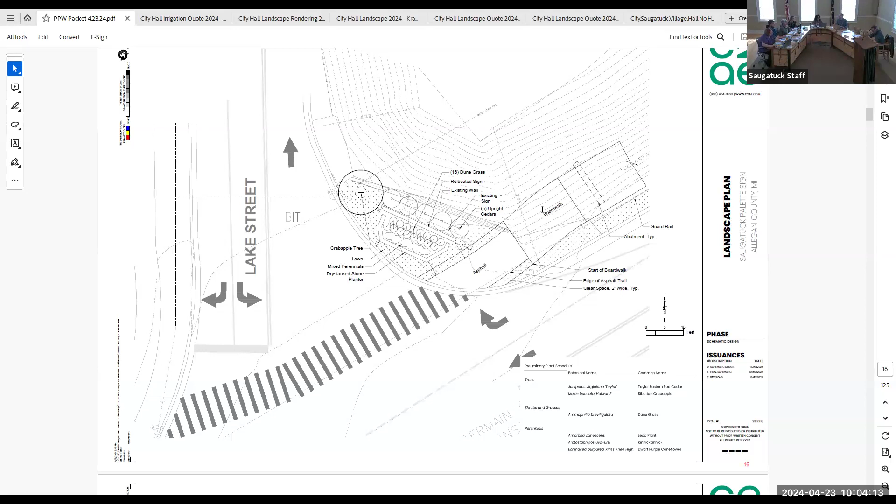Yes, please. Can you share that through Zoom too, so that way if there's... All right, so if you kind of zoom in, Sarah, it's in the middle of the page there. Zoom in, not... there we go, all right, yeah, a little bit more, my glasses, a little bit more, okay, a little bit more if you can, yeah, there we go, all right, so.

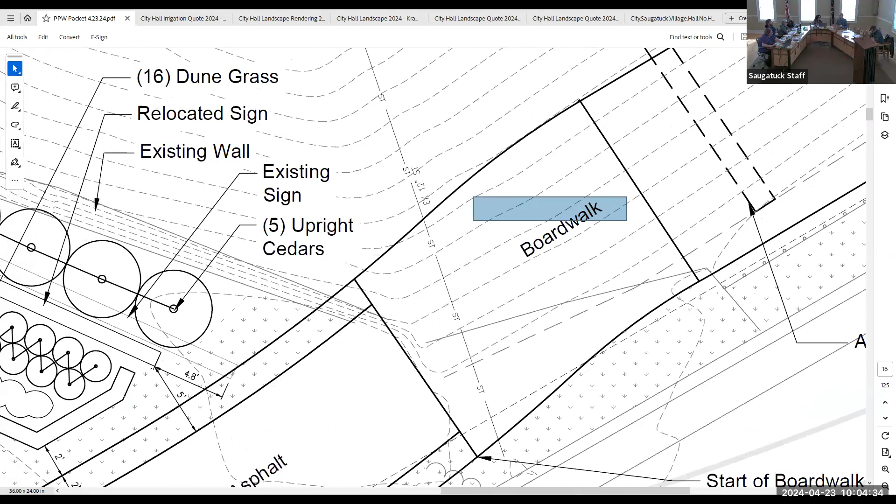There we go. So you can see that notation there on the right side of your screen that says 4.8 feet. That's showing, essentially, you're shifting the pallet sign nearly 5 feet, is what that shift is there. The lighter rectangle behind it is the current location of the pallet sign, and then the darker line is showing the relocated sign.

And then Brian, can you point that out? Sure, what do you mean? Brian, will you hold your microphone so that people online can hear him talking? Is that helpful, I don't know if it works or not, but. So the lighter line here is the existing pallet sign, and then this is where the pallet sign would be moving to. Right here shows the shift from here to here is 4.8 feet.

Then you're looking at what Jared clarified, looks like a quarter of a foot shift forward as well. So it's potentially closer to Lake Street and not down the ravine, is what he's saying. Got the shift on the sign, okay. My understanding is that right, okay, that's accurate, Jared? Yes, yep, so, yeah.

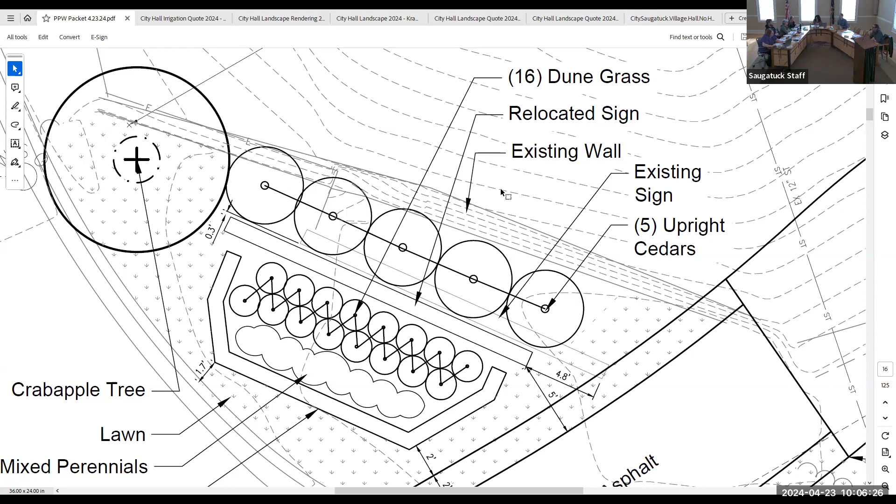So not a ton of movement of the pallet sign, but enough to move it to make sure that there's adequate space for the trail. I think initially there was some discussion at one of your first meetings about maybe even leaving it where it was. And then there was concerns about maybe not having enough separation between the trail and the pallet sign. So they've also updated, and you can zoom back out, the intersection layout, and took out that middle pedestrian island that there was some discussion at the last meeting about whether that was necessary or not, especially if there was going to be signals and things like that.

There's also some concerns raised by the Department of Public Works related to plowing and whether or not that was going to be an impact on their operations there, as well as the ability for those larger trucks to have space as they're turning.

So the intersection design has been updated, and the traffic signal placement is really dependent on what the ultimate final design of the intersection will be. In your packet is another copy of the rendering that Fleis & VandenBrink, our city's engineers, had previously developed, and their traffic signal design will be consistent with that rendering. Correct, Jared? Yes.

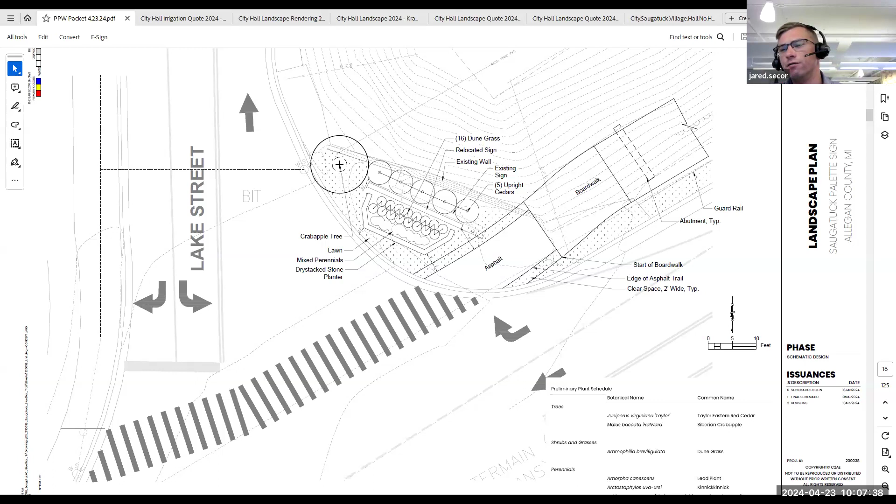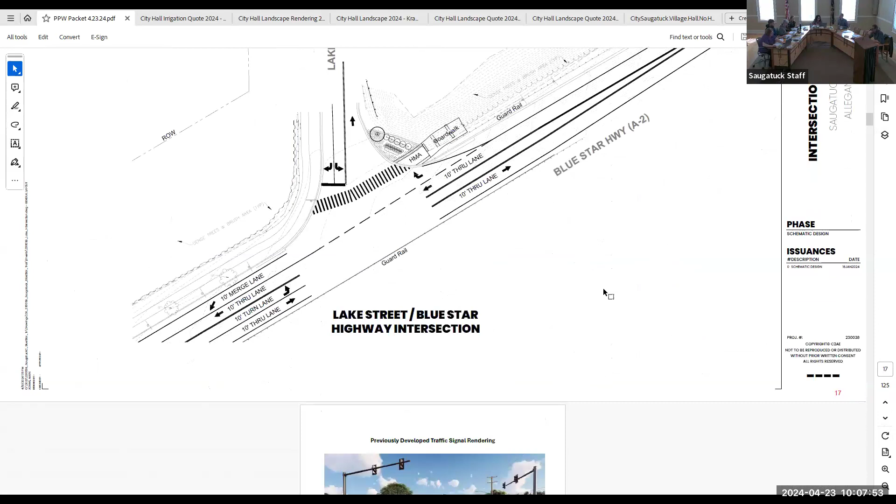Anything else that I missed, Jared, that you want to add or touch on? No, we didn't look at the other plan because we gave a more overhead view of the intersection, not specific to the landscaping. Not too many details there other than the roadway markings, and that detail's included on the other sheet. Yeah, we did want to look at that — that's page 17 of your packet, and Sarah has that on the screen for you.

Now, Nancy, I know you had questions on the light placement. Right, just that this diagram doesn't show where the traffic light would be placed. And Jared, can you comment on that?

Yeah, so we are using a sub-consultant who specializes in traffic signal design. With them, it's not so much the conceptual design iterations we've been working on for our layouts. We want to give them an approved layout so they can go to work on the traffic signal design. We need to get this approved before they get started on it. So we are anticipating doing the traffic signal in the locations shown on the rendering from F&V. However, as far as the process goes, we need to have this nailed down before our sub-consultant starts working on it, just in case anything changes down the road design-wise.

You mean the plan needs to be finalized and then you'll be able to decide exactly where the light goes? Well, this whole intersection in general — the traffic signal is for the intersection. So as far as where the lane goes, how much curb we're adjusting, we need to have that all finalized before our traffic signal sub-consultant starts moving forward with their design.

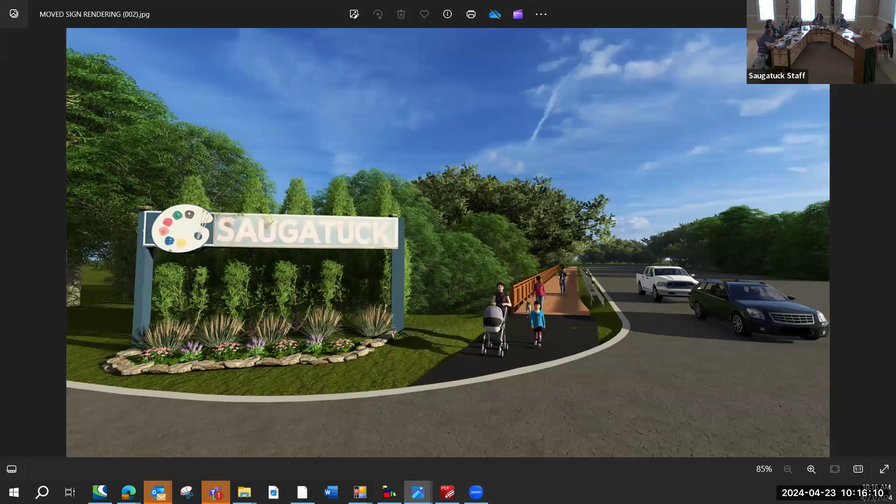So it seems like, if the lanes stay the same, how is there room for that? I think the lanes are getting more tight, more narrow. Is that correct, Jared? The traffic lanes are actually going to be a little more narrow, aren't they? Correct.

This will... and you guys are seeing the layout right now. Can we move back to it, please? He had it up there. Yeah, can we move back to that one? Is that you, Jared? Okay, you up? Can see that. There you go. Okay, so which way are we going?

This would be looking north, on the Douglas side. What we had discussed is this was a plastic bollard that was included in the original design, just for this graphic, but stakeholders didn't like that. So we had discussed putting in a raised curb with a kind of decorative wave delineator, between the traffic lane and the bike lane.

Okay, so are we stealing from the shoulder? So there's the sidewalk and then a little bit of the shoulder on the east side of the street? So then that's being put on the other side and then potentially narrowing the lanes, and that's where we're getting the space for this to be going both ways.

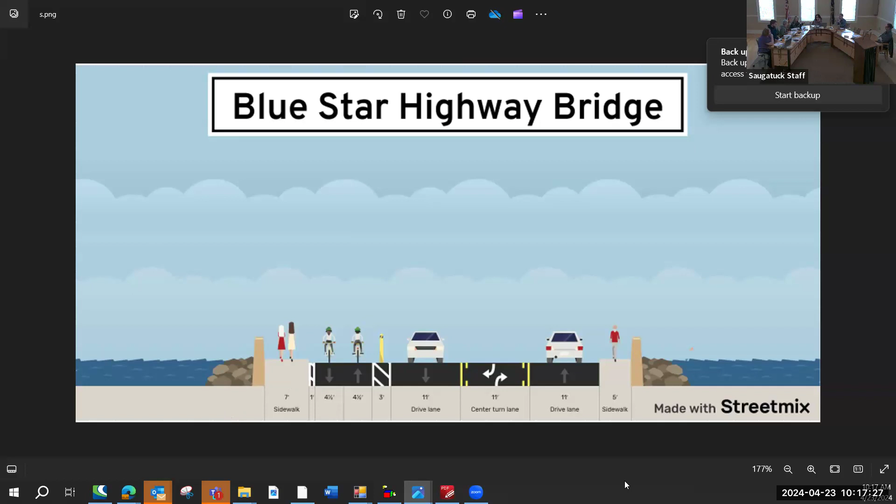Okay, how wide is the bike lane right now? Like 5 feet? There really isn't a bike lane per se. I mean, it's just a tiny shoulder, there's just a little bit of shoulder. So if it's gonna go to 9 feet, then it's gonna come from somewhere.

If it says 4.5 and 4.5, but to my mind, there's a bike lane there. But I don't let my kids ride on that. When we go by, they go on the sidewalk because the cars go so fast and the shoulder is so close. Okay, so some of it's coming off the shoulder then. That makes sense. Thank you, that's very helpful.

Does that make sense to you, Nancy? Are you good with that, being shifted in that way? Yes, yes. And then the roadway's everything's gonna be compressed a little bit, and then the shoulder will be eliminated, and everything's gonna be aligned on the west side. Got it.

And Scott, as far as you know, what is it? So we're 33 feet on the road that accommodates the emergency vehicles and that sort of thing? Do we have any issues there if we take some of the shoulder for the bike lane? Not that I'm aware of at the moment. All right, okay. And then 4.5 and 4.5. Got it.

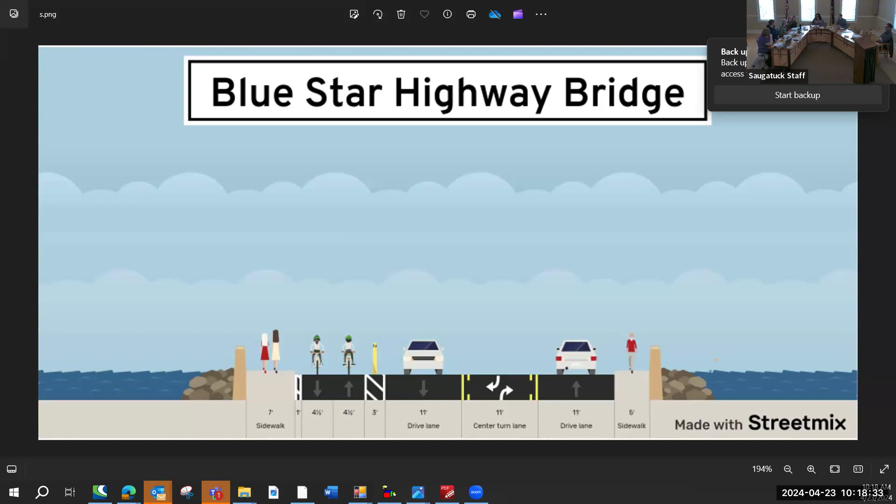Okay, so the last question I have is just going back to the pallet sign. Is there money in the grant fund to cover all of this, or is there any extra cost associated with our pallet sign relocation plan? So based on the estimated cost right now, is the city going to get an extra bill?

Does the grant cover it? You know, the original grant, we always knew we needed to move the pallet sign. So with the design that we've selected and the plan that we've got here, is there any incremental cost to the city, or are we good? Because the grant money is adequate, we think, to cover all this.

Yes, everything included with the pallet sign changes would be included under the grant. And as of right now, the only item that we've identified that wouldn't be eligible for the Blue Star Trails grant would be the traffic signal. Right, okay, that's perfect. And there's room in the grant, at least based on the updated construction estimates that C2AE was able to put together. So luckily, the construction estimates are coming in as expected, even though this was all put together a few years ago.

You don't always see something surprising like that, that's wonderful. So, now granted, that's not bid yet, but maybe we'll end up in the other direction and be even happier.

Those updated numbers are looking good, including the pallet signal work. I appreciate Ms. Roche for forwarding a grant opportunity that has arisen that we might be able to apply for, to have the traffic signal work covered under a separate grant. It aligns well with the goals of this project, and Jared was able to hop on a webinar last Friday to learn more about the opportunity, and feels we may be a good candidate. Obviously it's competitive, there's only so many dollars, but the answer's definitely no if we don't apply.

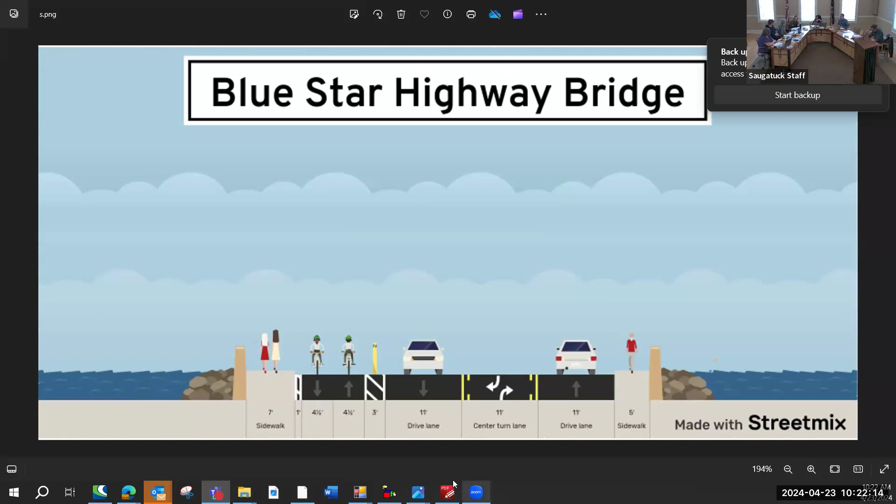And I know we got John's comments, but Scott, if anything has changed with the truck turning radius, we do not believe it's an issue. So as it stands, we're good with moving forward with just doing the rolled curb and the smaller curb size. That should be sufficient and also less expensive for the city, and we don't have to change as much in terms of the pallet location because of the setbacks.

Okay, we're all square on that one? We went back and forth on it, there was a need, and then we talked it through, and it was great that John was here and you were here to kind of walk us through that.

I just want to make sure we're all on the same understanding. Is that your understanding and you're comfortable with that? Yes, moving ahead with that. Jared, you're comfortable with that too? Yeah, okay, that was it for me. Nancy, you got anything else? I'm good. Brian? Nope, good.

All right, with that I will entertain a motion to take this to council. I will motion to recommend that city council approve the Lake Blue Star intersection improvements, including pallet sign movement and landscaping consistent with the designs, and installation of a traffic signal consistent with the renderings.

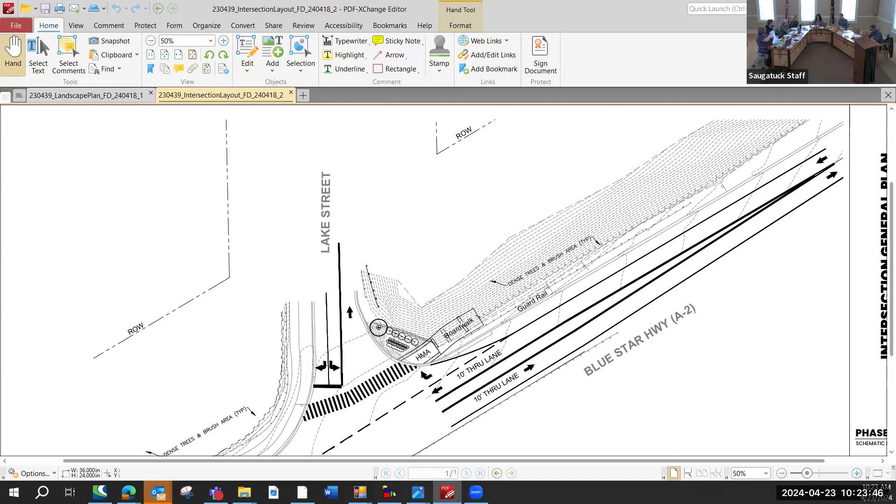We'll work on reviewing this with city council, based on your recommendation as well as the historic district commission, as it relates to the pallet sign movement. I'm sure they'll be happy to see it's not a dramatic change or anything along those lines.

Our next item, unfortunately member Johnson isn't here because I know this one is near and dear to her heart. It's about having some land engineering and landscape architecture services proposed for Park Street. I don't know if the city manager wants to take that away.

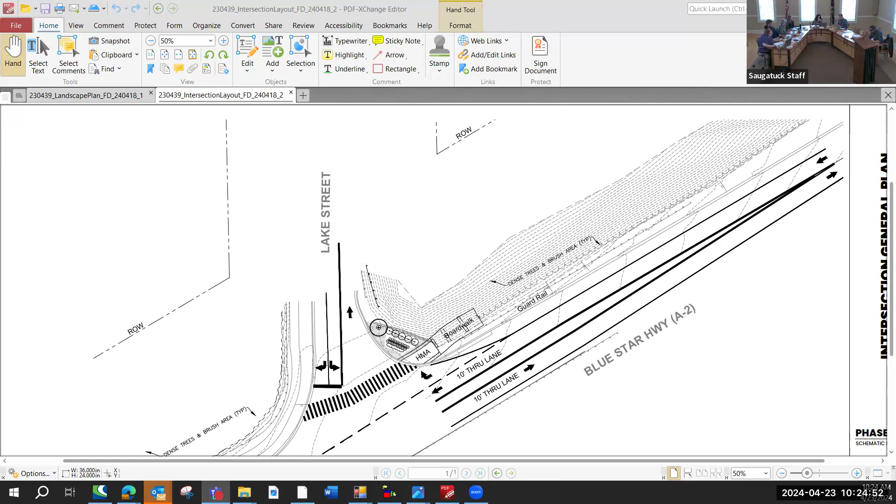From a high level perspective, at your last meeting you discussed some interest in maybe moving to the next step and looking at Park Street planning and conceptual design as it relates to offering a more pedestrian friendly corridor. Our engineers at Fleis and Vandenbrink have put together the next step as far as the survey work that would be needed, as well as what that planning phase would look like.

There's some costs there. We did discuss this with the city council as well. Initially staff didn't include this within the budget proposal for next fiscal year, with larger concerns related to funding overall improvements. It's a huge chunk of dollars. We have other projects that are ahead of it on the capital improvement plan.

Except there's a stretch from the chain ferry to Mount Baldhead that we're looking at because there's some retaining wall work that's needed in there. So there's an opportunity to maybe chunk some of the work, but the city council felt that this was an important next step and they were willing to fund this proposal.

We're working on adding that into the proposed budget for next year, but wanted to make sure that you had a chance to take a look at the work that was planned and are at least aware of it.

So we can open up for discussion. I would say from my perspective, and I've always had this position, is that I think we need a more walkable Park Street. Whatever we need to do to get to that point has definitely been a hot topic - people have different opinions about whether we move the landscaping and the encroachments. There's encroachments from the city to the homeowners and in the opposite way a lot. I am absolutely in favor of whatever it's going to take for us to get something that is safe and practical along Park Street.

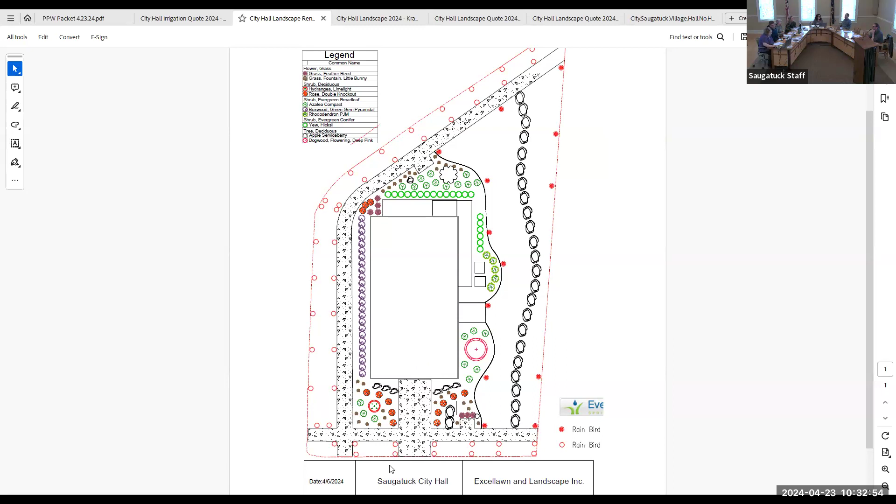And then if you want to go to the next one, which is maybe Kramer Services. This one, I brought a rolled out version of it. This is the one that I got from, that's GMS.

Kramer did a great job. They're doing the work out there right now. But this one, it's a little bit hard to get a real good grasp on what exactly that'll look like out in the field just by looking at it this way. And that's another reason why I really like the next one, which is from GMS.

This looks great. If you look at all the plantings, one of the things I communicated to the landscaping companies is that we have a very dated building, and we don't want to put a bunch of exotic plantings in there to take away from the architecture, but also it wouldn't match the classic colonial style that the building really is. So we're looking for very tried and true—I wouldn't say boring, but very classic looking plantings.

A lot of boxwoods, trying to stagger different color throughout different seasons, so some knockout roses, hydrangeas, things that aren't too crazy. But then if you want to pull up the GMS one...

GMS, their number came in a little bit high initially. They had a small retaining wall on the front of the building. If you want to go through a few more.

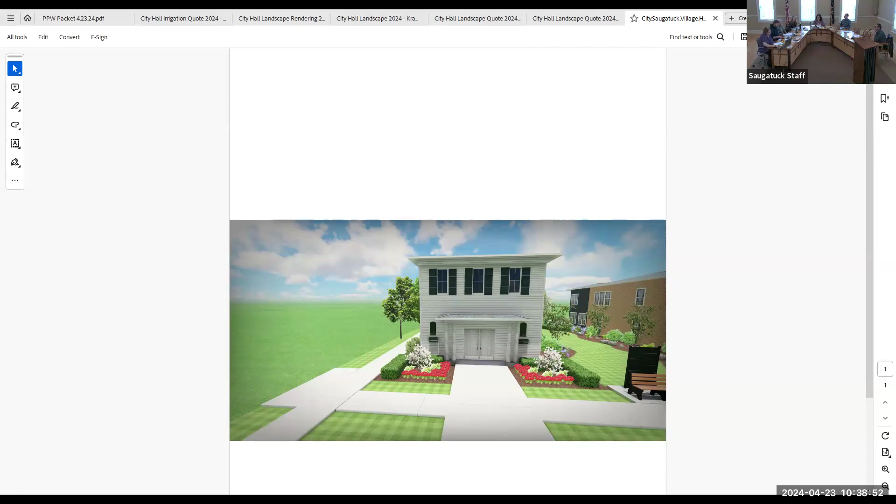That's really it. We definitely want to get feedback and take notes from the comments, so I appreciate the feedback. I think next steps, Ryan and I can review some of the feedback we've gotten and hopefully get a quote in front of council and get the project across the finish line.

Timeline wise, I think GMS is planning on tackling this in June. We always try to get this stuff done before Memorial Day, but the reality is that doesn't always happen - all landscaping companies are really busy in the spring. June the town is still a little calm, where July and August it's no way. So hopefully that can get completed in June.

Any further questions from anybody for Superintendent Herbert? No? All right, thank you, Scott.

Just to update the PPW, the city council last night did approve another round of milfoil treatment for this summer, so that's moving forward.

One thing I would request - last year when that was done, I happened to be over at the yacht club and kids were sailing. They released the chemicals into the water directly where the kids were playing, where they had fallen off boats. We pulled them out, had them take showers immediately, but it was not a great situation.